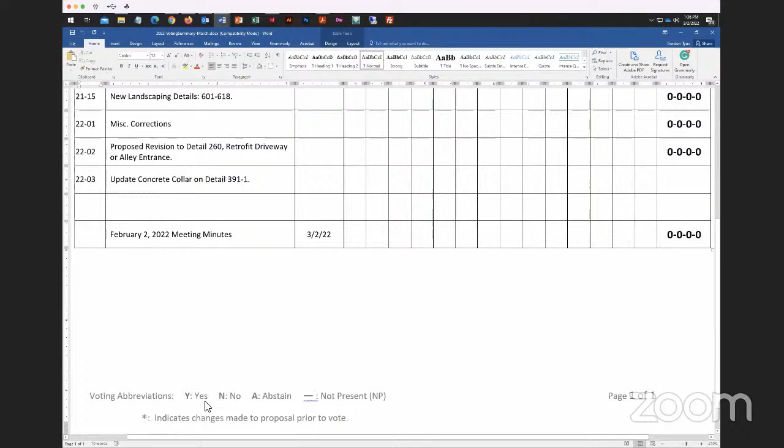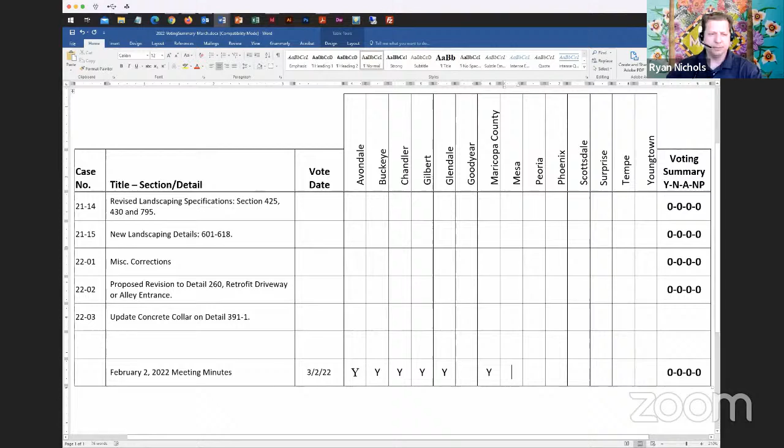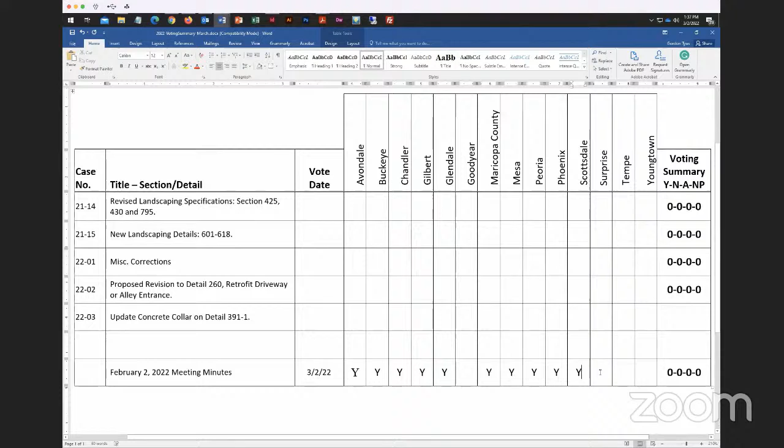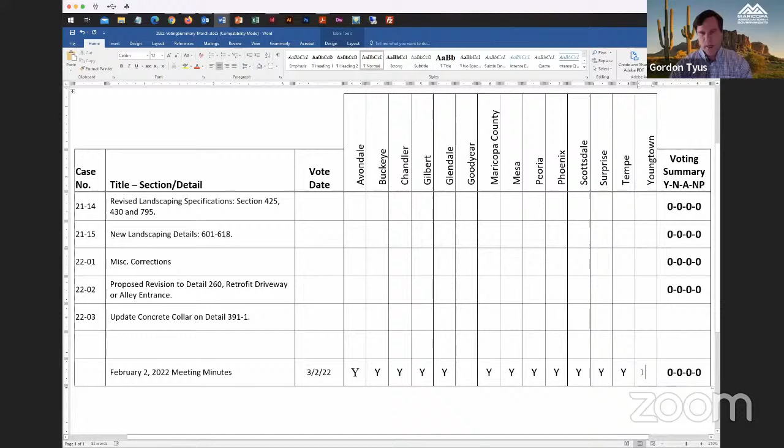Okay, and we'll do a roll call vote on the meeting minutes for today. Gordon, if you want to walk us through that. Sure. Starting with Avondale, yes. Buckeye, yes. Chandler, yes. Gilbert, yes. Glendale, yes. Goodyear—anyone from Goodyear? Maricopa County, yes. Mesa, yes. Peoria, yes. Phoenix, yes. Scottsdale, yes. Surprise, yes. Tempe, yes. Youngtown? Guess they're not present.

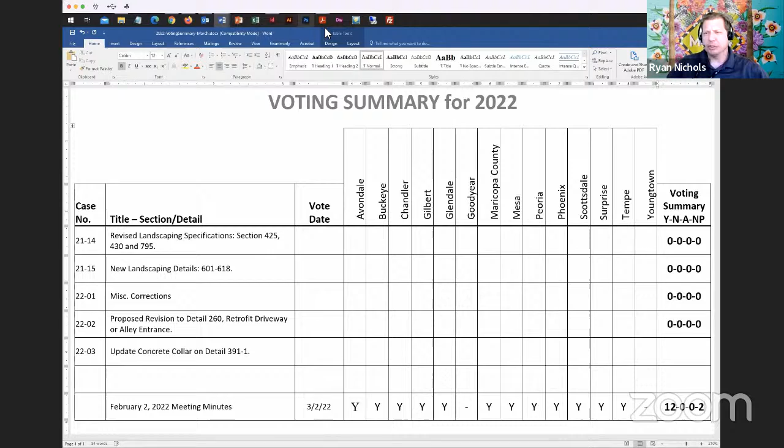Okay, thank you, Gordon, I appreciate you walking us through that. So we're ready for agenda item number 4. Actually, Gordon, I think I missed on the agenda any introductory discussion. So before we get into those agenda items, do you want to talk through the potential for meeting in person?

Sure. We're notified by our executive team that for the month of March, they are beginning in-person meetings for our policy committees, which include the Regional Council, Management Committee, Transportation Policy Committee, and so on. Then beginning in April, they're going to start in-person meetings for any of the technical committees, including our own. So if this group would want to meet in person on our April meeting, which is on—let me check the calendar real quick—April 6th, we would be open for doing a hybrid meeting where we meet in the Ironwood room as we've done in the past, but also have a Zoom meeting that people could join remotely, and the people in the room would also participate because the mics and video in the room would be fed through the Zoom system as well.

So that's, I guess, what MAG's plan is, and I just want to get the feel from this group. If you're ready to come back to meeting in person, if you prefer meeting in person, or would prefer to call in, we need to get an idea how to support the hybrid meeting. Those are some of the things I'd like to get feedback on.

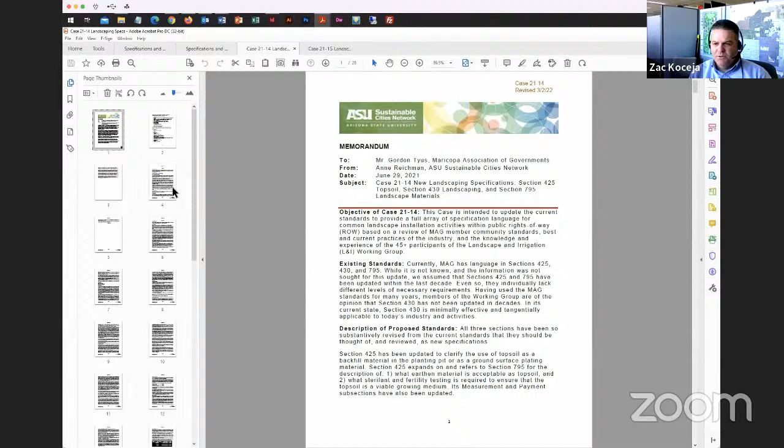With the beginning of 2022, we've picked up this effort again, and in the last month or so we had a couple — I would say minor — comments that were added. So I went through and updated those, incorporated those comments into what we have today that's available in the packet to review. The most recent wave of changes I incorporated, a lot of them were grammatical in nature, sentence structure, things like that. I don't know that there was anything really major that would change the intent of what these specification sections are focused on accomplishing.

At this point, I think what we're requesting is that this is our draft of these three sections, and we're hoping we can get these out to the MAG committee and solicit any comments in the next month or two, and hopefully finalize this process and get these incorporated. It's been a long time coming — the landscape and irrigation specifications and details in MAG are very outdated. A lot of cities in the valley have their own supplements to MAG, Mesa included. So I think this is a really valuable effort to standardize as much of this as we can, so it becomes a really good resource and tool for the cities in the valley.

Ryan, that's kind of the overview and introduction. Is there anything specific you want me to talk about, or? Well, let me just clarify one thing.

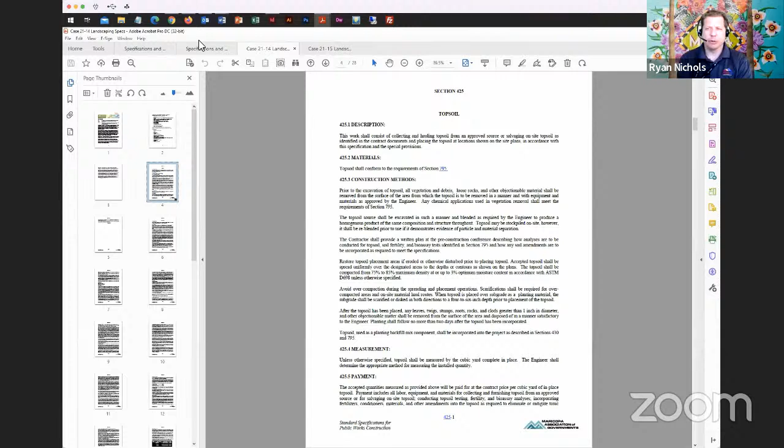I think the latest version was not in the packet itself, but has been posted to the website now. Is that correct, Gordon? Yes, and I sent out an email reminder this morning that included the link.

So they're on the meeting page here. These are the latest versions that were just uploaded today, this morning. So this is the latest and greatest for you to download and review.

I know they're hoping to get the final reviews done. My understanding is some of the edits that were just made were based on comments received by the city of Tempe. In our last meeting, I know there were a couple agencies that had indicated they wanted to get the specifications and details in front of others within their organization. I have not received any additional comments thus far, so I don't know if any additional comments have been generated yet.

If not, please take a look at the most recent drafts here, as we just showed with the links, and then please forward any comments to myself, and I'll make sure they get sent to the group, including Zac and Wayne. Peter, did you have something else that you want to talk about with regard to these?

Yeah, I just wanted to thank everybody for going through these. We've had these on the agenda for quite some time. And I think last time we talked about getting these revisions in which incorporate comments received to date, giving everybody a month or so to go through it, and then looking for a vote in May.

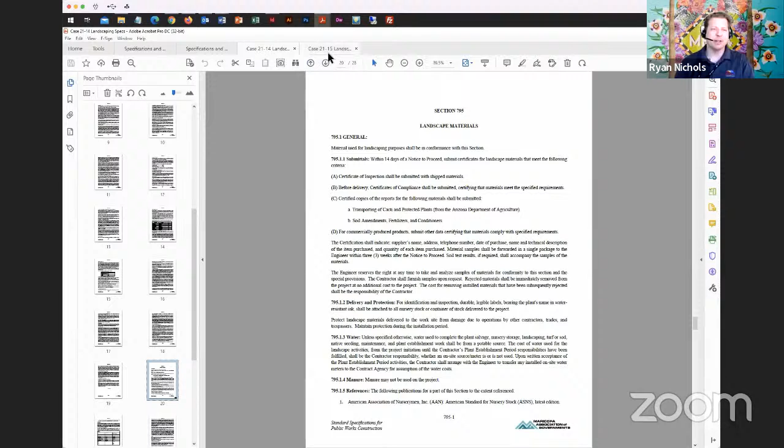We've got the expert here today, so today's the best day to ask the questions. Peter is here today, so that's good. Oh, no, I only know the landscape I got to do in my yard. No, I've done a little bit, but you guys are the better experts. No, I appreciate Gordon, Peter, and Ryan for your guys' involvement and support to get it to this point. So yeah, thank you.

Yeah, I think they're looking good. I've gone through, when we had it through the working group, I went through and had my detailed comments, and I think these are the first, we have details now. We didn't before, so I think that's a major improvement from where we had been.

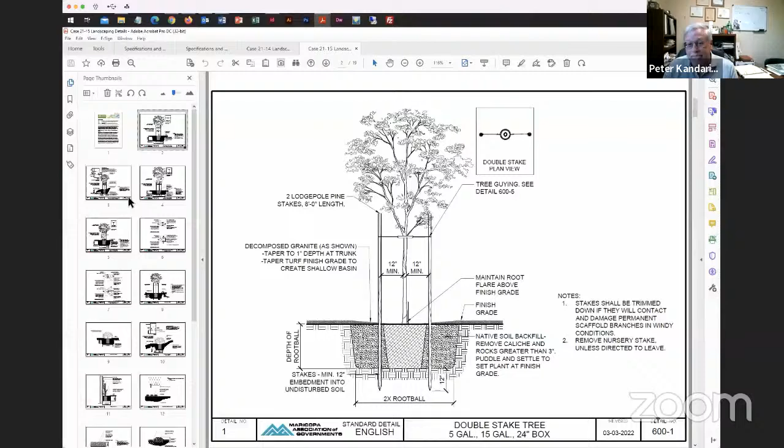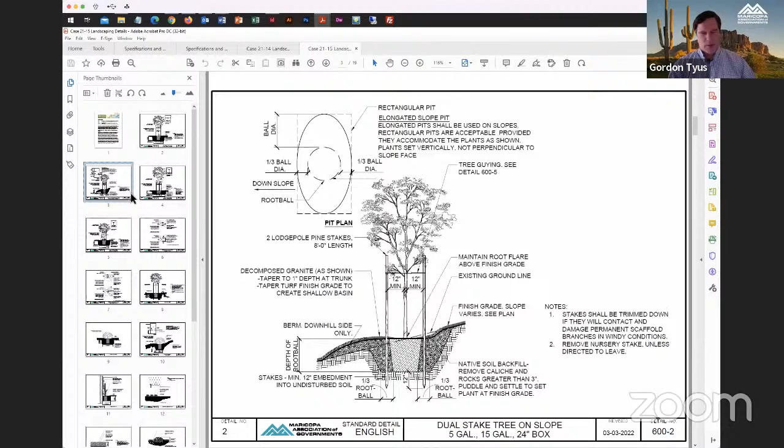This is Warren. Just a minor comment on this one, for example. I think the 600-1 detail number on the bottom right, we just need to have the 600-1 on the lower left as well for consistency. Easy stuff. Yeah, right now they've all been numbered as 600-3 and so on.

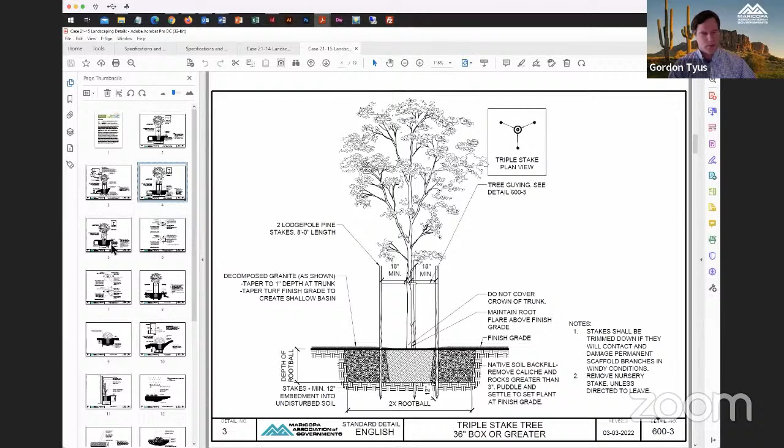Is that the preference of the group, or did you want to have different numbers for each one, like 601, 602? But yeah, you'd want the same number on this side as well.

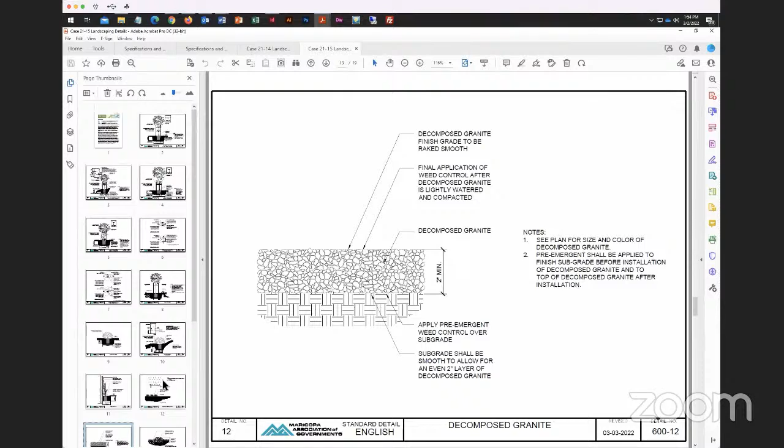These are all planting details then, right? No, I would say there should be distinct detail numbers for like the granite. Maybe you could have a series for the planting, but I would say it should be a distinct detail number.

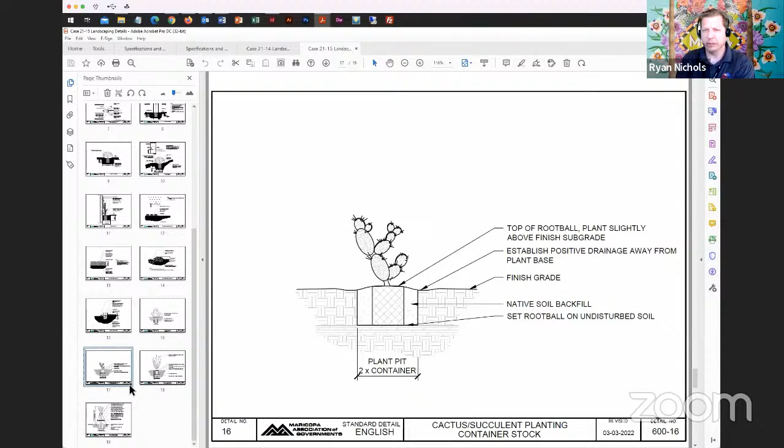Do we have any other details? The 600 series is new, correct? There's no current 600 series? Correct. And I guess the question that I would have is, is there an intent to have other details be 600 series in the future? We're going to have the irrigation details too in that same series.

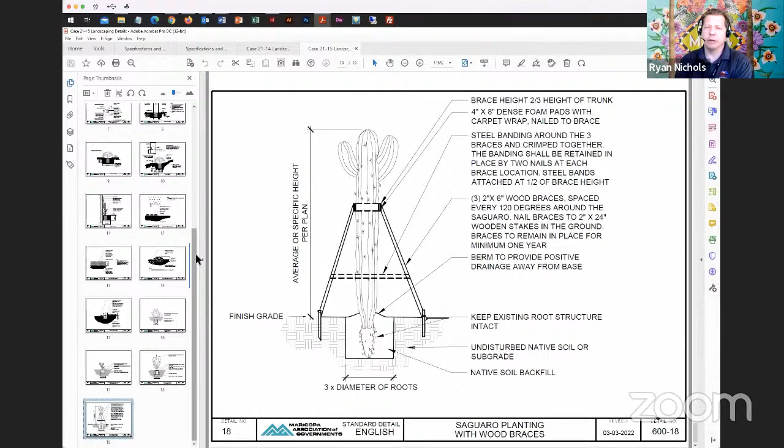Okay, so we're not going to run out of 600. If every detail was numbered individually, 601, 602, 603, we're not going to run out of numbers for this, right? We may want to look at putting some of these in a series, like planting details, to try to start grouping them a little bit in terms of concept. So hardscape versus vegetation, things like that could be one way to look at it.

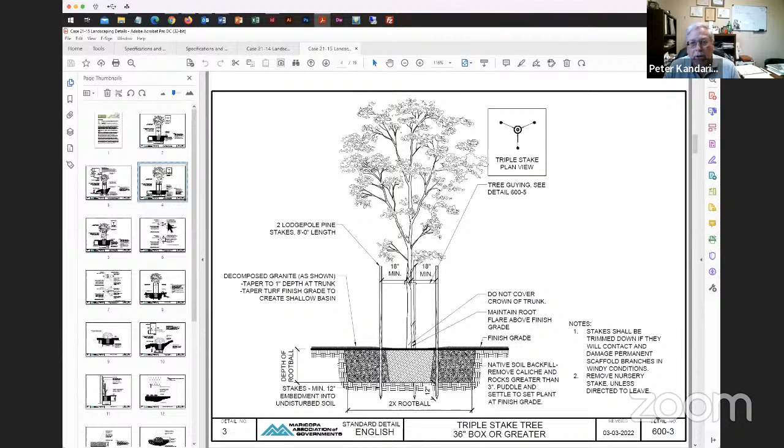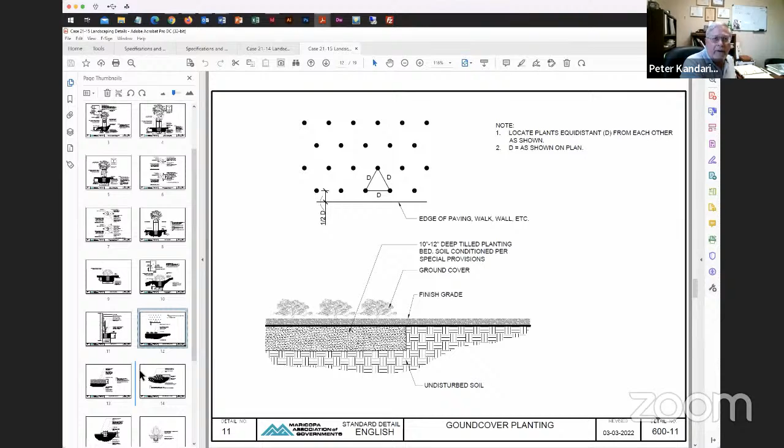Yeah, I agree with that. I think that makes a lot of sense. I don't think there's any value in just having it 600-5, 600-6, and continuing the series for every single number. Yeah, let me take a look at that. I'm going to give a shot at what I'll send you, Zac, a recommendation when I'm looking at it. I want to look at another standards book that I've got and see how they're doing their series.

And see how they're grouping these. Again, I know hardscape probably is going to be one group. So, 601 hardscape, and then there'd be -1, -2, and so on.

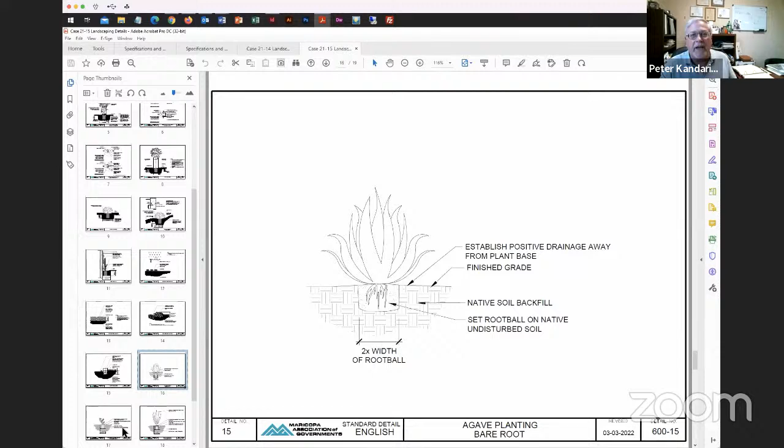But I need to look at another standard that's been used in a similar manner, and I'll send you a recommendation at least. This is Carl. The 600 often refers to the section in the written specs, at least that's how we kind of do it at the county. And 600, I believe, in the written specs is more like concrete related, or channels or concrete. Whereas we developed landscape specifications

and they're under 430. So I don't know if you want to think about that in terms of what number series you want to use. I don't think this, 400 is wastewater though, Carl. Yeah, is it? Yeah, I don't know that the specification sections align with the detail numbers.

Is there any other place in MAG with landscaping? Yeah, there's currently a 700 series also. Chandler is using 700 if that helps. And I think we're using 600 for streetlights and traffic signals.

Yeah, that's a problem where the specs numbers don't necessarily align with the same on the details. They don't really align on any of our details though. But it is a good point that if several cities are using similar numbering systems for their landscaping, whether it's 600s or 700s. Yeah, with the county, we try to align the spec, the details, and the bid items, at least the root number of the bid item with the parent section in MAG.

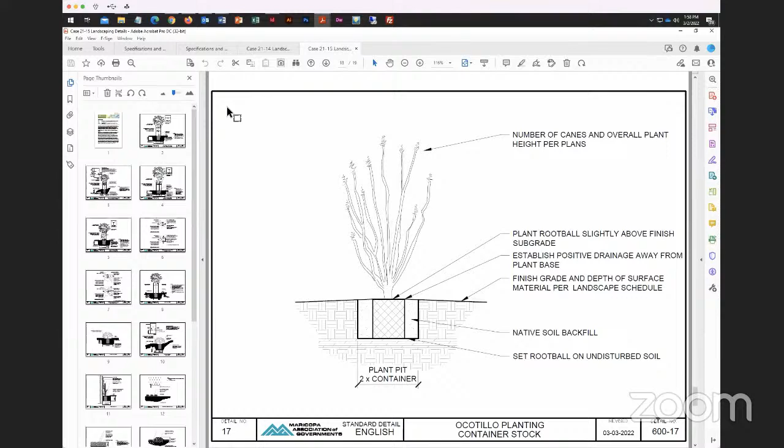And sometimes we actually create a new section, but something similar in the 400 or the 600 series. Yeah, in Avondale supplement, we don't have any details for landscape irrigation, but we do have a spec section, and it aligns with the specs and spec section in MAG of section 400.

Yeah, so we run into the challenge of how best to start a new section with something a few cities already have. And some agencies, they have it as a separate document completely outside of their supplements, so they don't even, as far as I know, have a similar series number. So it's really up to the committee. What do you want to do? What series do you want to assign to these landscape irrigation things, or do we want to start a section that deals with things that aren't anywhere else?

Yeah, I know these details will actually become bid items, so you got to kind of think about that. If it's a bid item, then it possibly refers to a section in MAG that describes what it is and how it's measured and how it's paid for.

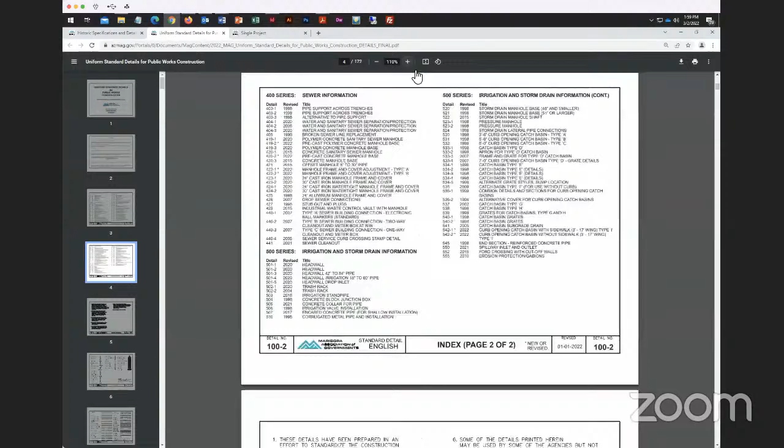I think MCDOT has kind of evolved to try to get them somewhat related. We would need to do that in a lot of MAG if we were going to do that, because right now that's not the case. Right, that's a bigger discussion than this, yeah.

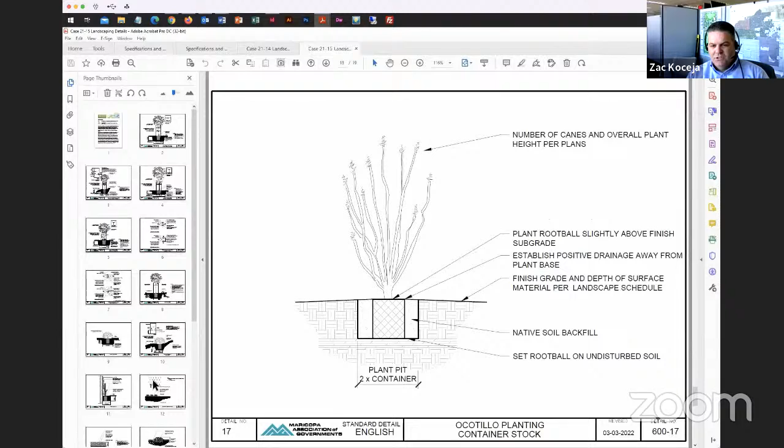Well, landscape, all of your details you're showing here, are they plant related, or are some of them concrete? That's the majority of them, but there's also a concrete landscape header curb, a DG placement detail, a boulder placement detail. And then we'll also have a series or grouping of landscape irrigation related details as well.

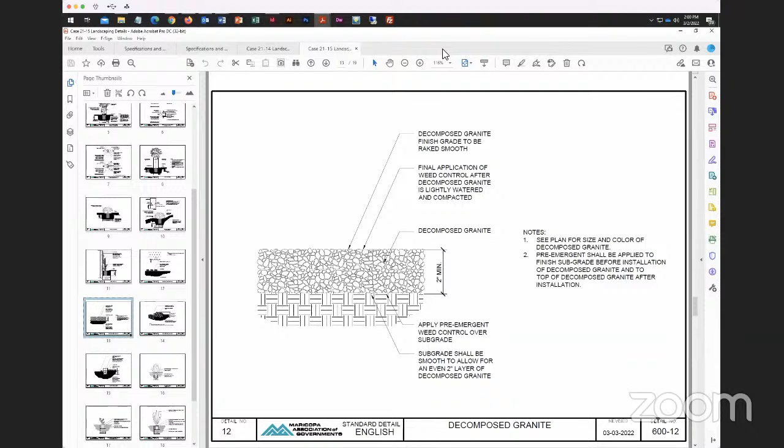So that'll complement this. Yeah, some of them are somewhat concrete related, and others are more plant and landscaping related. So yeah, it probably is kind of tough to say. But yeah, they probably should all be in a series that's somewhat by itself and not confused with another part of MAG. And we also have to realize if we get the landscape irrigation, we don't want that confused with irrigation as it's described right now in MAG, which is more of a piping system. Think of it that way.

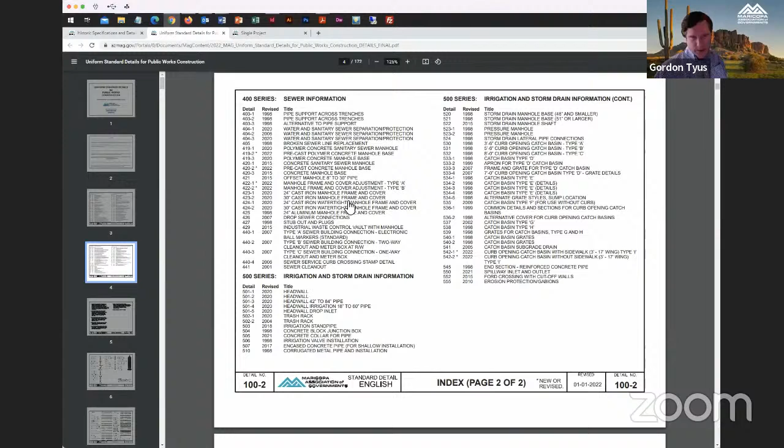Yeah, I've just pulled up our current detail table of contents just to show that it ends in the 500s right now. Okay, so yeah, we actually are in a brand new section. So actually that makes sense then.

And just related to that, one thing I wanted to point out is our landscape irrigation, we don't just call it an irrigation section. We always put landscape in front of it to help differentiate from any sort of irrigation or storm drain information, like what's on the screen. So I'd suggest that we keep calling it landscape irrigation, and that helps to really set it apart from any other irrigation system that may be covered by MAG.

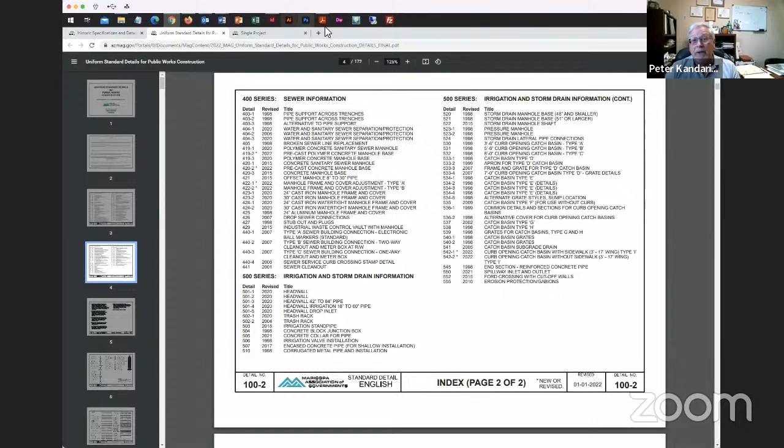So right now we can hold with just the numbers, but I think by the next meeting we probably need a decision: do we want to go 600, 700? I think we chose not to go into the thousands intentionally, because that would get more confusing. So I think we had 6, 7, 8, or 9.

600 I think is fine, but you might look at grouping them, like a 600 series, a 610 series, if there's some differentiation within your details here. Yeah, that's what I wanted to go look at, another source I've got for how they've been grouping their standards.

There's a national CSI format, not federal, and they also have that grouping system. So that's what I wanted to go look at, to see how CSI has been doing theirs.

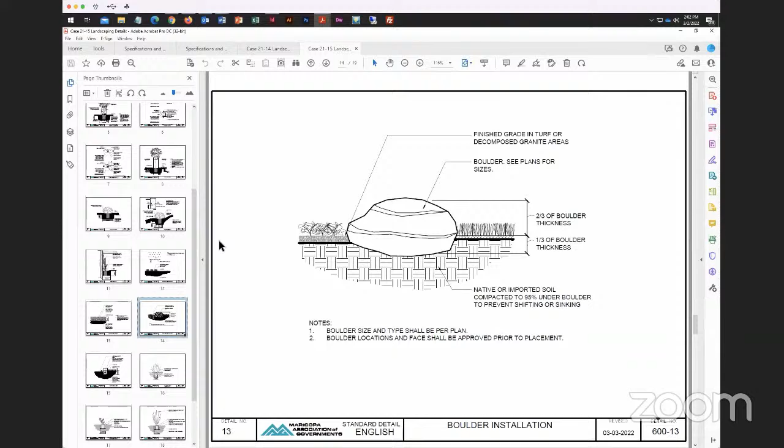Peter, was the intent to have landscaping under one 100 section and irrigation under a different 100 section? No, the thought had been we're going to put them all under one. So everything would be a 600-something for any type of landscaping setup.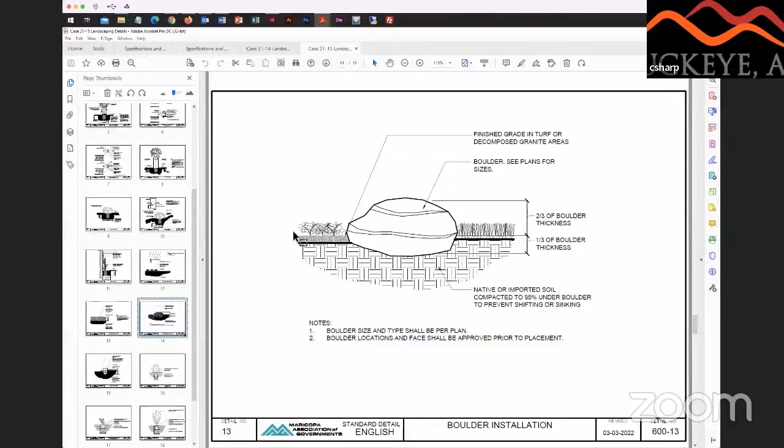Landscape irrigation, if somebody comes up with something else. I'm even thinking, how do we want to handle gabions? The existing gabion, is that really more of a landscape hardscape feature, or truly a wall, or do we want to look at a more landscape-specific gabion? Well, that would go in the landscaping section if it's not a structural element. I'm thinking they'd all fall in that same arena.

Zac, do you know if there are any other changes to the details other than numbering them? No, I don't believe there was, I think it was just an effort to update the numbering. I know Wayne worked more specifically on those, but I don't recall anything else being mentioned in our last few meetings other than updating it to the 600 series.

If I remember right, these are heavily borrowed from City of Tempe. Correct, because we got the CAD details from them.

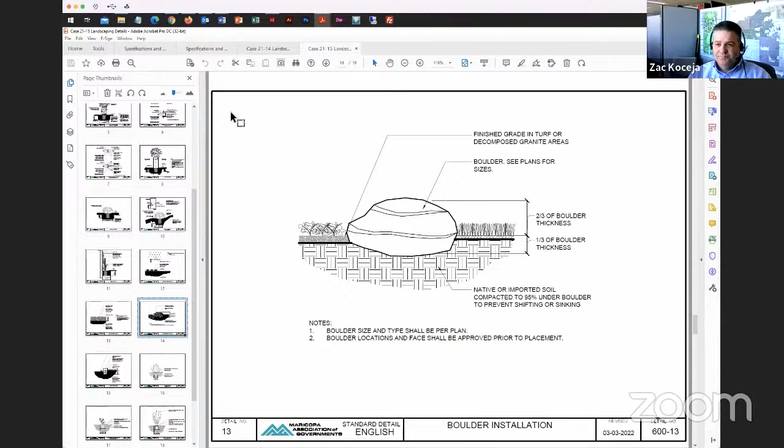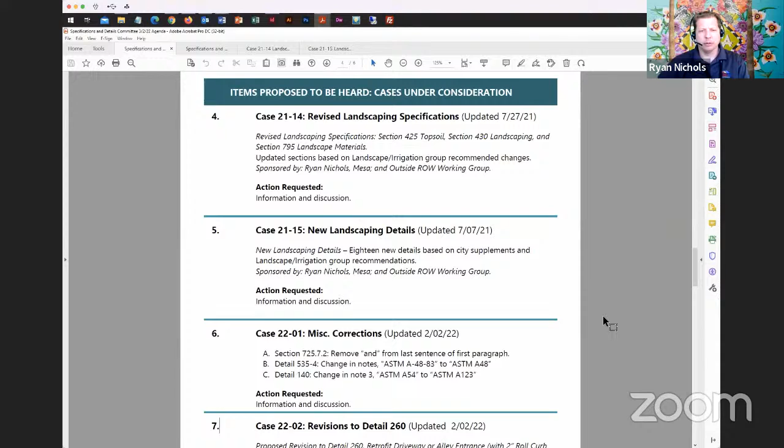Any additional questions or comments on landscape specifications or landscaping details? Once again, if you have a chance to have people within your agency review those this coming month, please send me any comments and we'll work to address those.

Moving on to agenda item number 6, case 22-01, miscellaneous corrections. We've got three of them: Section 725.7.2, to remove the word 'and' from the last sentence of the first paragraph; Detail 535-4, change in notes, the ASTM numbers are being corrected or updated; and Detail 140, same thing, the ASTM being revised from an outdated one to a more current one. Are there any other miscellaneous correction items people would like to add?

Any other discussion on these items? Hey Ryan, I apologize, going back to item 5, I forgot to mention, when I was on the MAG website today, Gordon, the links for the landscape items are not working right now.

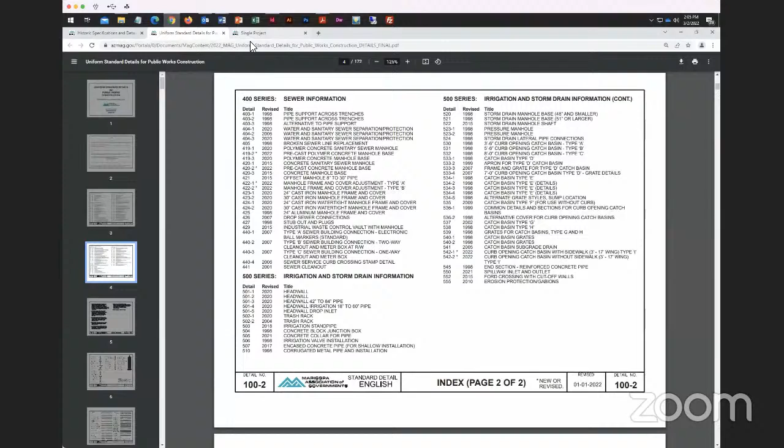Let me check here. So these ones? No, the case links. The case links, on the page before this. Yeah, the under-consideration ones. Oh, these? Yeah. You're right, I guess we'll have to check on that. Okay, they are linked here on the materials side, so I'll need to fix these hyperlinks, but they are right here and here in the list if you want to get them there. Okay, thank you.

Good, I like that, Warren. That means you're downloading those and sending them to people for review, right? Exactly. Do it during the meeting, guys. That's good, that's a good strategy. If I knew how to do a thumbs up in Zoom, I would. I only know how to do that in Teams. Thank you, guys.

Moving on to item number 7, case 22-02, revisions to detail 260. Warren, you want to give us an update on this one? Sure, I have not received anything in terms of comments from folks out there, so unless there's anything, let's go ahead and open it up.

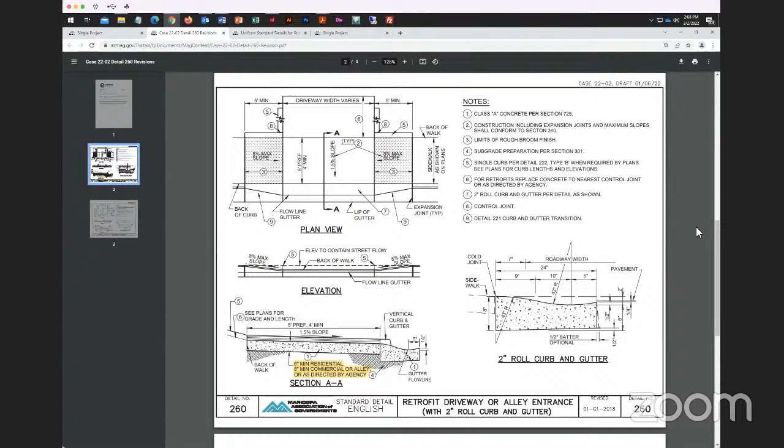It was a pretty simple update, just that in yellow, to update the thickness for commercial or alley to 8 inches. So unless there's any feedback or comments on this, I guess we might like to call for a vote at the next meeting. Anybody have questions or comments, or feel like they need more time to review this detail? Okay, hearing none, then Gordon, let's put this as proposed action for our next meeting.

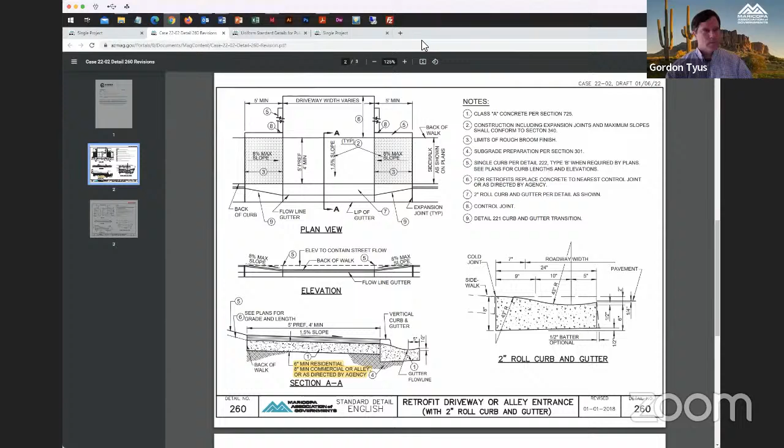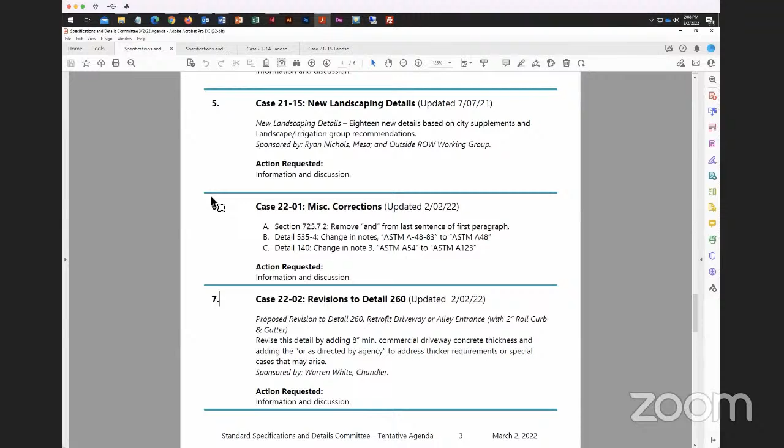Thank you, Warren, I know you spent hours and hours working on this intricate detail. Exactly. All right, let's move on to case 8.

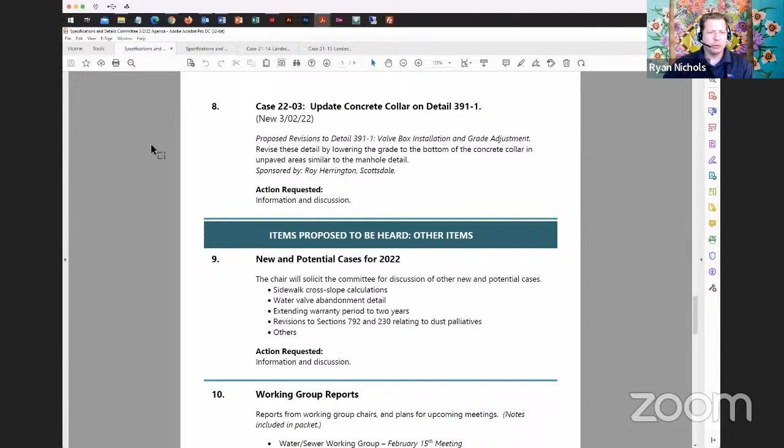Item 8, agenda item 8, case 22-03, our update to the concrete collar on detail 391-1. And Roy. Hello everybody, so this was an item that we brought up for the first time last month. The discussion was to bring it forward as a normal case.

Essentially, where this is coming from is a comment that's come to me from our maintenance folks out in the field, having issues with the existing collars around the water valves, basically getting silted over or even getting plugged. And that was when we started looking at the detail.

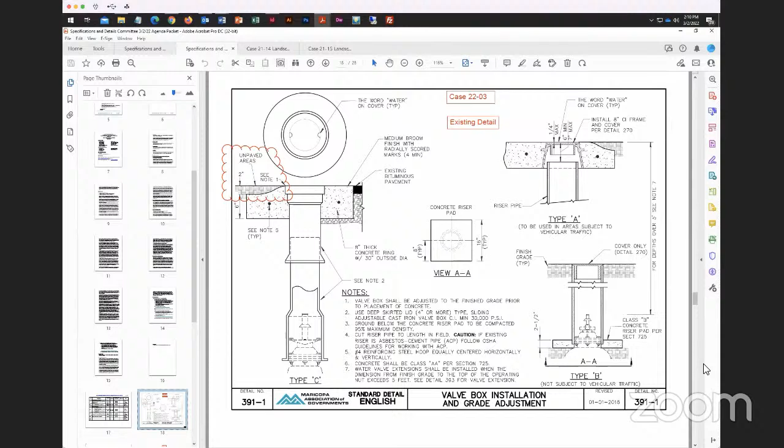What you see in front of you is the detail as it exists today. On the left side I've clouded it there. It shows the 2 inches of cover over top of the collar. So we discussed this a little bit in the meeting, about whether the collar needs to be curved like it is there, or whether it can be straight and flat.

I went back and talked with our maintenance folks, and they were certainly fine with having it as a straight slope, but they still would prefer to keep the 2-inch elevation difference between where your existing grade would be and where your top of collar would be. So the difference between what we had last time and this is that the slope is now a straight line as opposed to a curved portion. I also added the call-out underneath for the diameter, the 40-inch outside diameter.

That 2-inch difference is coming from some of our other existing details, which are the examples that follow. This is the example of our survey markers, where we've got a 2-inch difference in areas that are not paved, and they also call out the 40-inch diameter for the collar. The next example is our sewer cleanouts, where also in unpaved areas we've got the difference in elevation between the frame and the top of the collar. And the last one, which we looked at last time, is the manhole frame and cover adjustment, again for areas outside of pavement where we've got a 2-inch difference.

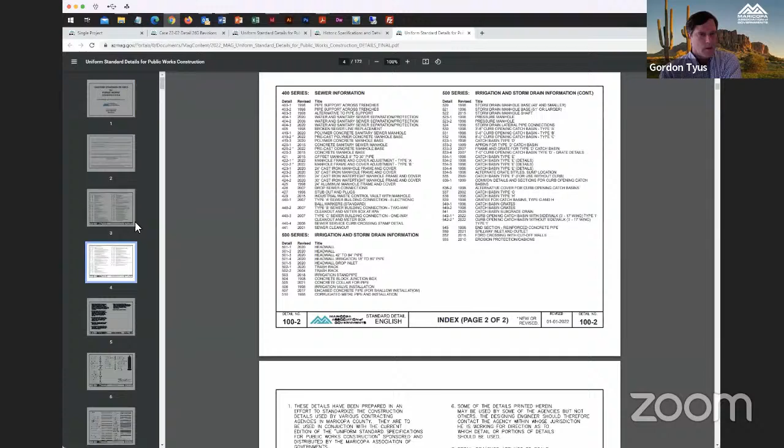I think that's what 391-2 shows, if you look at it. I don't know if Gordon's got the whole book handy, but I believe that's what it shows. Yeah, there's that concrete at the bottom, the pad. So we could actually take the concrete pad detail and move it over to the 391-2, because on the 391-1 the pad's not used, since it's the cast iron valve box.

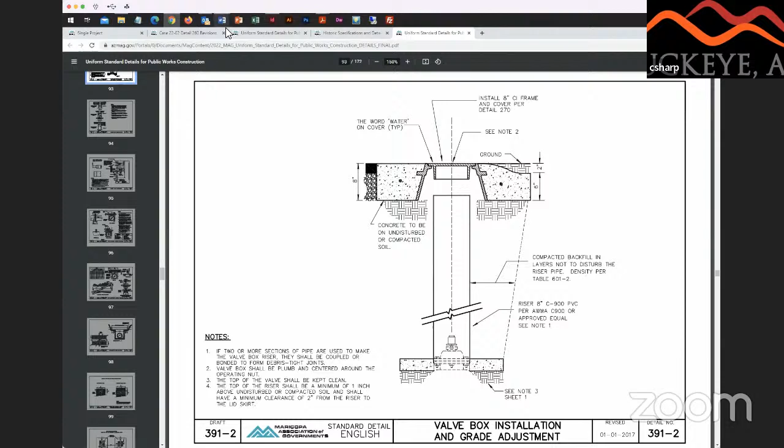I think 391-2 is more the adjustment part, so they're not going to go down and put that riser pad when they're adjusting the valve boxes.

It just seems like we have way too many adjustment details on this one, right? I mean, the graphics need to all be consistent, but there's some consolidation here that we could make. Maybe.

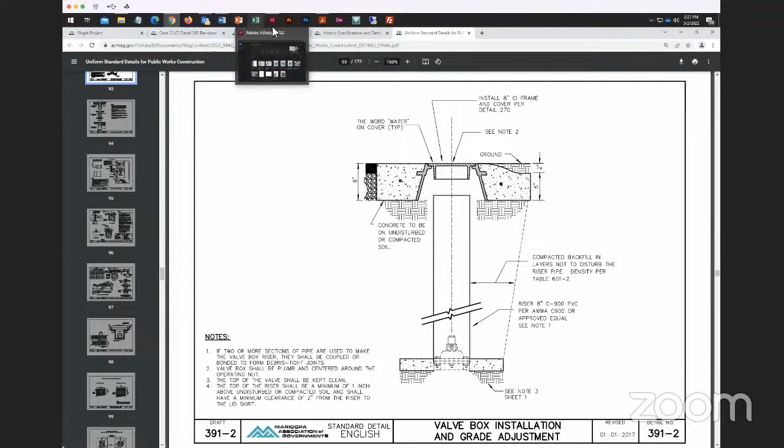I think on 391, we could definitely combine those two into one if we're going to leave it on there. Yeah, I agree with that. I guess then it looks like the only difference, if we combine them, is you're going with a different frame and cover. But if it's the same, you're still having detail 270 for both your cover as well as your frame, because now you're adding a frame. Basically detail or type B becomes type A.

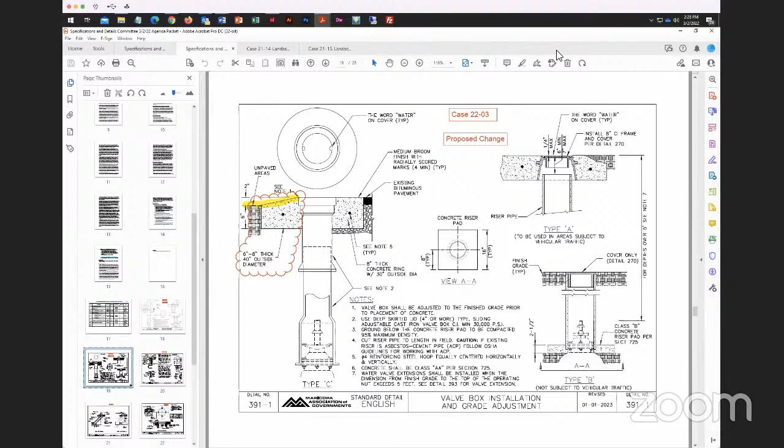So I guess back to, is there, or maybe I'm missing something. On type C, is the deep skirted lid in use today? Yes, that is, City of Scottsdale uses the type C. The type C, you can put different lids on it. You can do lockdown, there's all kinds of choices, and yeah, you can put a deep skirt lid if you want. That's what we do. We use a 391C, and then we just choose a deep skirt lid.

But Roy, I do agree with you. I think if we could combine the A and B, the only revision there would be we'd be adding a frame. So adding a frame, but then we would still want the collar too. Correct, so we add the frame and the collar, and then doesn't that become a type A? That's correct, yeah.

Speaking of this type A, would you want to make the same change to this one as you do for type C, where it goes at an angle and you have a 2-inch reveal? I would suggest that.

We can take this up at the working group, Roy, if you want to get down into the more nitty gritty of it at that meeting. But feel free to update this, and then you can submit it at our working group meeting. Will do.

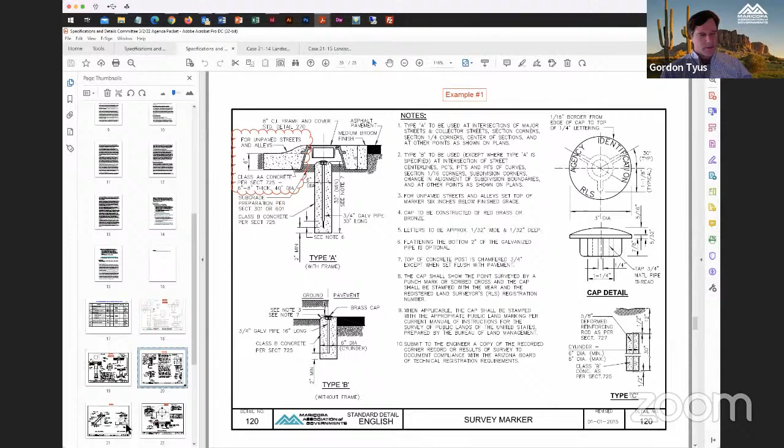Is there any thought to changing these details to a straight slant as well, the survey marker and the sewer cleanout?

I think consistency would be a good thing across the board. Yeah, I think it's pretty clear when it's a straight angle versus that reverse curve, which doesn't really have any data on how to exactly do that, so I think the straight grade is better for constructability. I agree. Plus the drafters will be happier too.

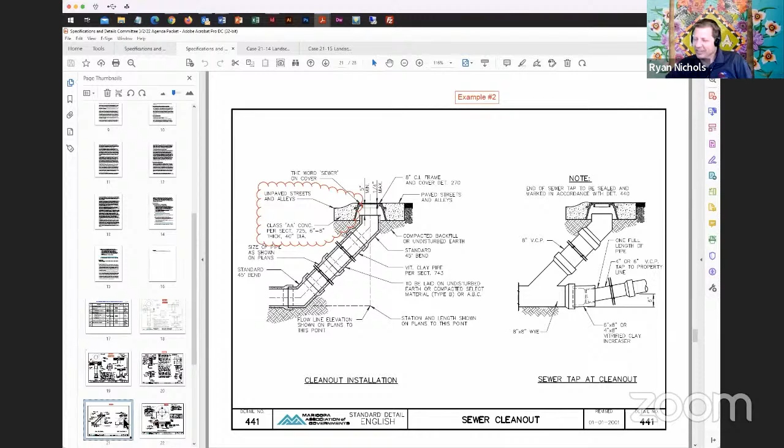Hey, I don't know that sewer tap at cleanout, it actually kind of rises up before it goes down. Yeah, you got a little hump there. Yeah, it does, little camelback.

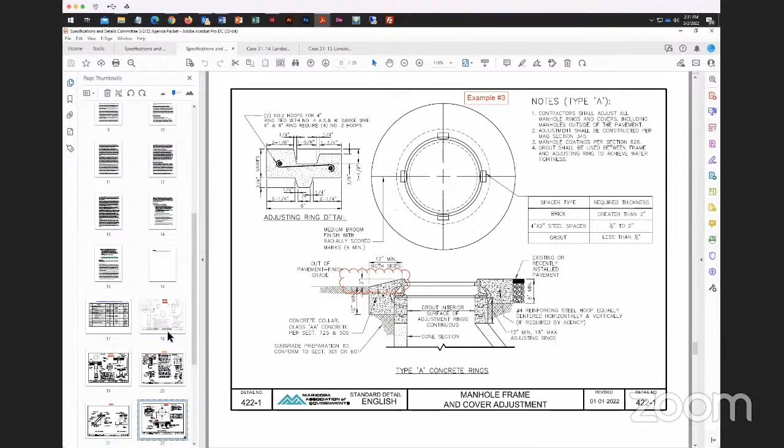Would the committee like me to basically revise all those? I don't know whether each one of these becomes a separate case, or we're able to keep it as the same case, but whatever the committee would like, I'm happy to revise them. I think a single case is fine as long as we're listing each detail we're modifying.

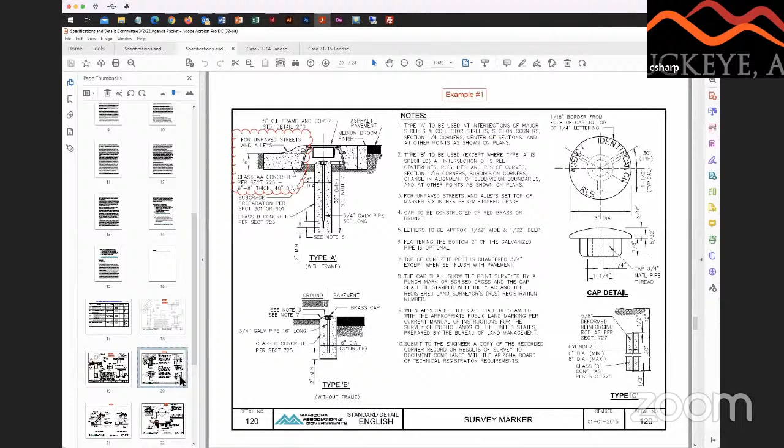Another thought is, if we're just changing a line on some of the other details, can we make that a miscellaneous case? If we're going to make major changes with 391, we can do that, but we can make just a miscellaneous case for changing the slope of the collar. I like that.

Are they all 40-inch diameter? The survey marker one calls it out, and the next one is just 40-inch, so that's 40, and the last one calls it out as well. Yeah, I think make sure we got the 40 in there. I think the really small ones just won't stand up in time with the traffic and weather, especially on unpaved roads. Right. Okay, I'll update those and I'll play around with the 391.

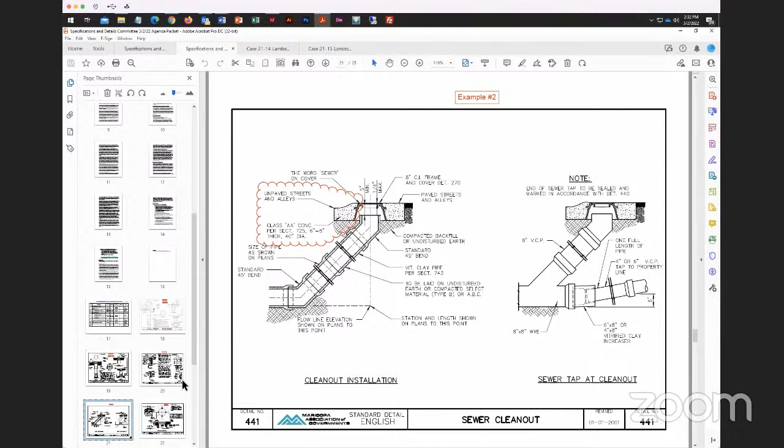Do we still want to have a Type B? I'm assuming it'll just be... I don't know what the difference between the A and the B will necessarily be. By definition, Type A is used for vehicular traffic, and Type B is not subject to vehicular traffic. I guess, Roy, I'd probably just ask around and see if anybody uses the Type B. If it's not being used, then we use Type A for vehicular traffic or off the side of the road.

So would the committee be okay if this detail ends up with a Type A and a Type C, but not necessarily a Type B?

I think that would be appropriate, because you got to go back and look at history sometimes, what we did have at one time. It shows up in court cases and other things.

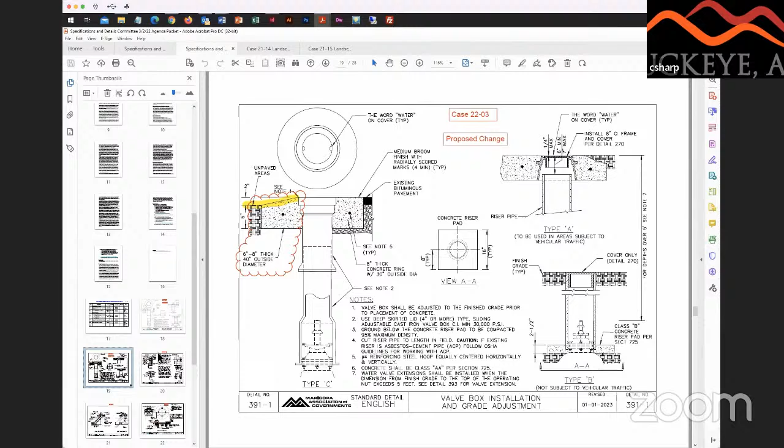The other challenge too is supplements actually call out 391-1 Type C. And if we change that Type C to something else, then supplements have to change. Exactly. Yeah, I don't think we want to change Type C to a different type, especially duplicating something we had in the past.

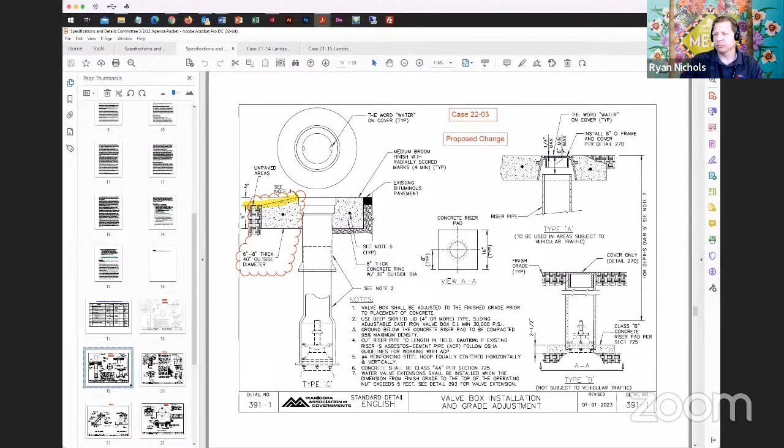If we leave out Type B, you might just put a note that says Type B no longer used, or Type B not used. Great, all right, thank you. Thank you, everybody, thank you very much. All right, thank you, Roy.

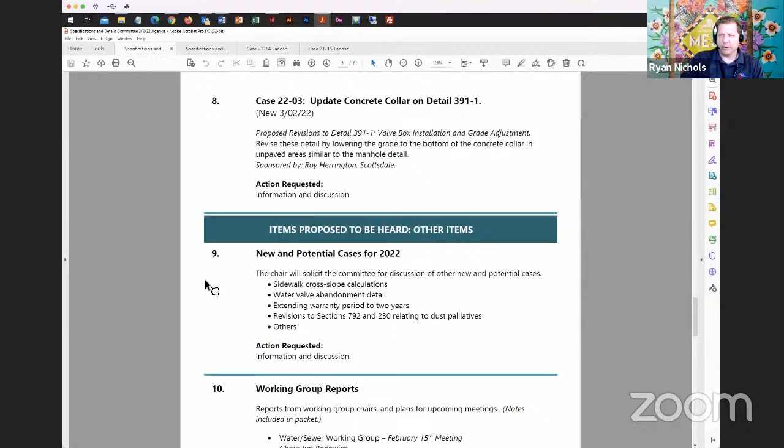Okay, agenda item 9, new and potential cases for 2022. We've got a few of them listed here. Before we talk about each one, I'll mention that the intent is to submit a new case for the landscape irrigation. We talked about the landscape specifications and details, but the irrigation ones are intended to be submitted for a new case in either April or May, depending on verifying that the drafts are ready. Those are new specifications and new details that don't currently exist, so we want to make sure there's a draft ready to submit for that case. That should be coming either April or May.

And then the other new potential case we've got on our list here is sidewalk cross slope calculations. Carl, I think that's one you've been looking at and considering.

Yeah, I sent you a hand sketch previously, and it might not have been really clear. So I took this detail, looked at it, and said, well, if we change the slope, the target slope on a sidewalk is 1% plus or minus 0.5%, then we get a minimum slope of 0.5% and a maximum of 1.5%. I thought that was the easiest way to do it. Or you could look at it as wanting a range from 0.5% to 1.5%. But I think in your design of your cross section, you might want to be somewhat consistent, and I hope changing it from 1.5% to 1% does not cause a lot of heartache in the design with the design people.

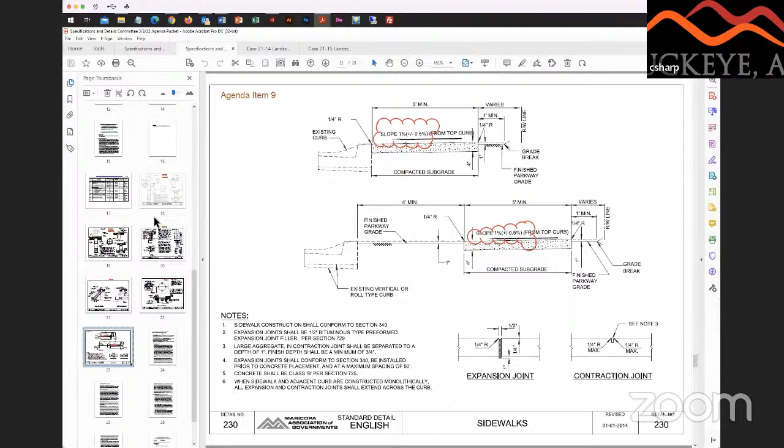I half recall our discussions back when we did the curb ramp details. We hashed this out a lot, as I'm sure all of us have done internally as well, these slopes and how to show them. But I think what we did is we put language in section 340 for the maximum ADA requirements, and we put the target on the detail, which is right now 1. But I'd have to revisit what we did on language on that.

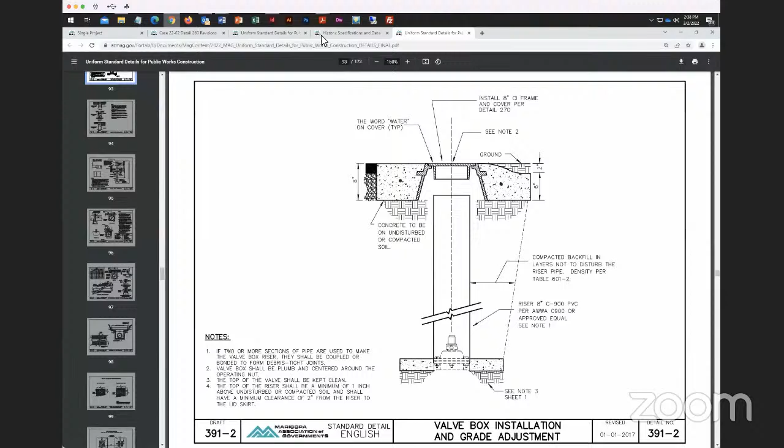I went to 340 and it says... I looked specifically for that, and it's got a plus or minus half an inch from plan, and that's where the thing originated from, how you could actually exceed 2% on a certain sidewalk if you went with that tolerance. So maybe we have to look at the spec too, or add something to the spec with the same range when it comes to sidewalks.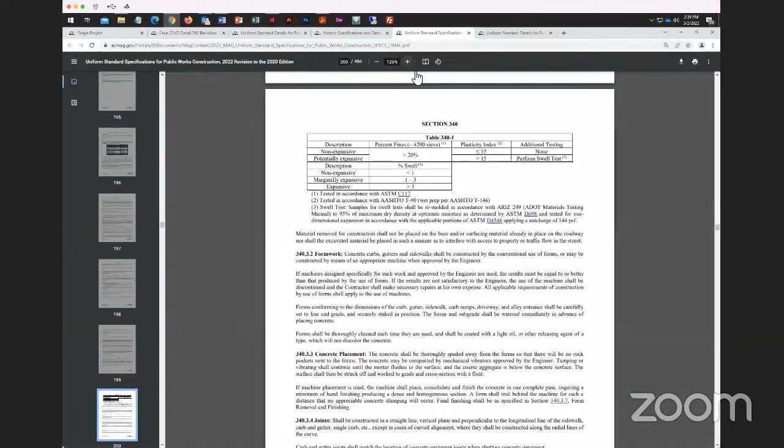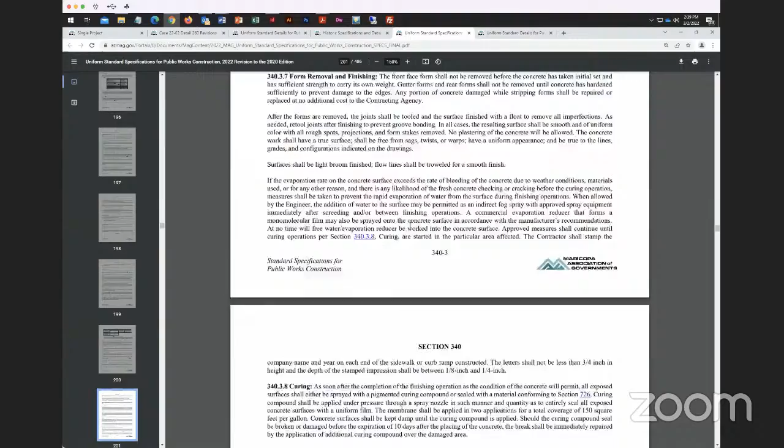I hear what you're saying, Carl. I thought we had something else in here about the ADA maximums. No, I might have missed it. Oh, there it is right there. Tolerances, slopes right there, the tolerances. One paragraph above deficiencies. Slopes of pedestrian, yeah, what is it? Yep, there you go.

So Carl, this is still a proposed case. If you're ready to submit a draft to present it as a case, you're welcome to do that at any time. Yeah, I do believe it is worthy, and we should do something about it, because we got a lot of sidewalk getting rejected for not being 1.5%. So yeah, I can go ahead and make it a case, or Gordon can. And I'll come back with your tolerances, as opposed to changing that grade, that design grade.

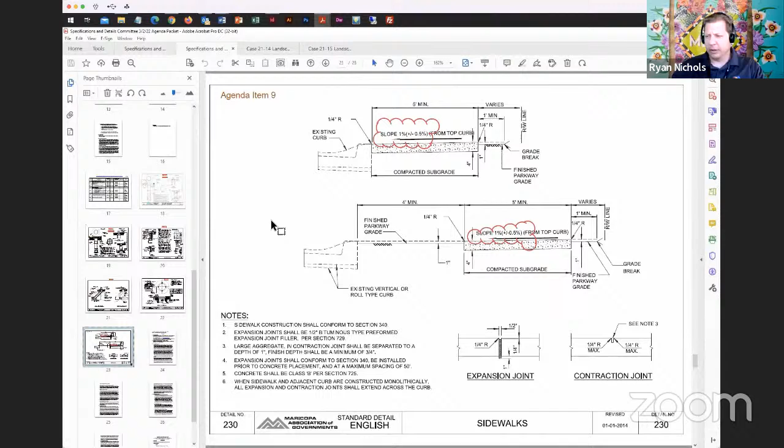The other proposed cases include water valve abandonment detail. Any news on that, updates? That was me. I don't have anything quite ready. Hopefully I'll be able to talk more about that at the water sewer meeting.

I liked that idea of having a manhole abandonment detail as well. So didn't know if people felt that could be the same detail, like we could combine both a water valve and a manhole detail, or should we keep those in the 300 and 400 series separate. But we can talk more at the working group. Yeah Warren, that's exactly what I brought up at the working group meeting. We should do one for the manhole as well. Yeah, I thought that was good, Jim. And I looked, Mesa has a good paragraph about the language there. So I saw 434.3, we can talk more.

Thank you. So Warren, you're continuing to work on preparing something for a future case, and sounds like we'll keep working on that in the working group. So thank you.

Extending the warranty period to 2 years. Any updates on this being a potential case? Yeah Ryan, I'm working on getting the specs. I've got 3 of them, I'm just kind of combining them. I did want to get a buy-in from the city. I know it's kind of a no-brainer, why wouldn't you want a better warranty, but I just wanted to confirm, and yeah, everybody wants it. So I'm comfortable with moving it forward with the case. I'm just working on putting it together now. Thank you, Jim. Yeah, and I think we had in our last meeting some pretty detailed discussion on that, and at least the initial feedback we got from the industry group was that the 2-year warranty wasn't a concern.

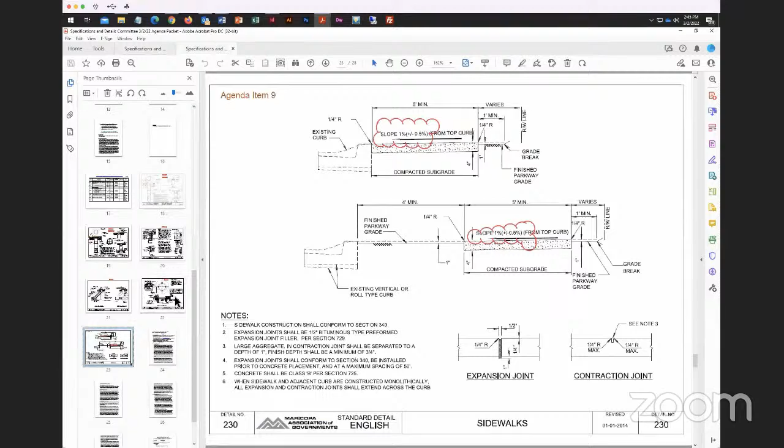Yes, we met on February 15th. It was an online meeting. One of the things we talked about was the case that Roy brought up on the valve boxes. So we talked about that.

The other thing that came up was sewer testing. As far as the gauge goes, I think most agencies do videos on sewer. Kind of looking for just people to say yes or nay on that. Yes, because yes. Okay, that's what I thought.

And then does the city do that, or do you guys use a third party? This is Chandler. We have a third party that we pay for the first. If they fail, the contractor has to pay subsequent.

So one thing we're finding out, we allow a third party to do that. We're finding that the gauge, typically you want to do it right after you hydrovac the line. You've got water in the line, and that's how you can determine if there's any bellies, sags, or deflection in the pipe. We're finding there's not really a spec that calls out how to do the gauge, and we're getting pieces of bent steel just with marker on it, very archaic I guess. The MAG doesn't really get into any detail on that, so we talked about maybe looking at coming up with a spec on that.

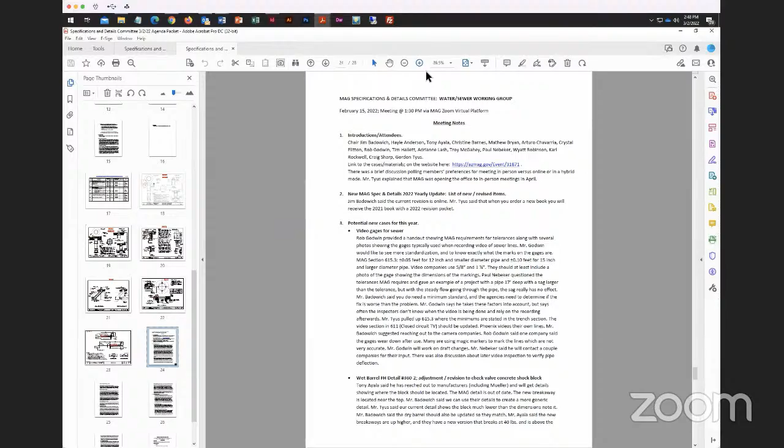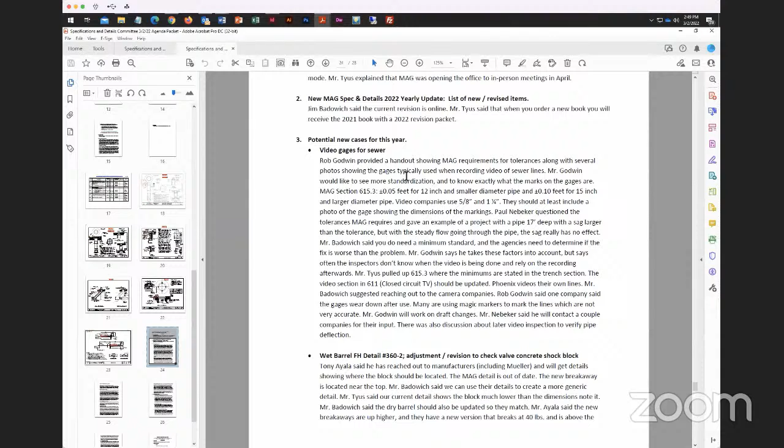We talked about, again, the wet barrel fire hydrant detail 360-2. We're finding out that the shock block isn't meeting what the manufacturers are doing, so we might have to put a range or modify that detail 360-2 again to match what the industry's doing with their check valves on the wet barrel fire hydrant.

Now I'm working on clarifying the detail on deep sewers, where we require, if it's deeper than 20 feet, to put rebar or reinforcing in the base, and I just want to clarify where that 20 foot stops. As I'm digging into it, I'm finding there needs to be more detail on how that rebar is supported. We had one where it was just supported on the edge, and when they poured the concrete it just dropped down in the middle. So there's nothing that specifies how to place that rebar.

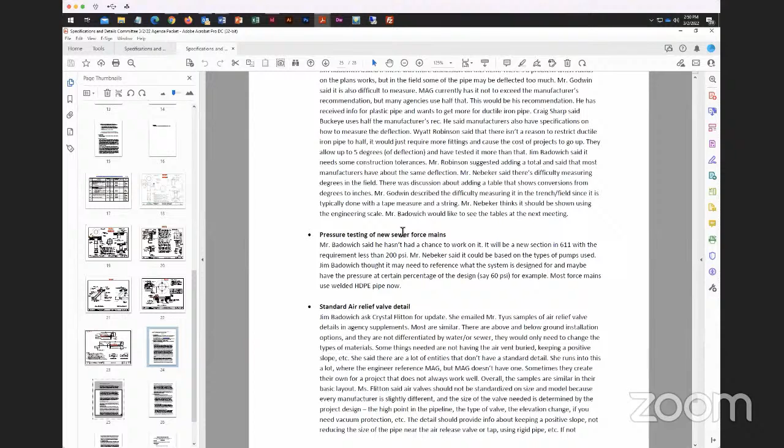Then the last thing we talked about was trying to come up with a standard detail for air relief valves. Crystal Flitton, she's an industry rep, had a lot to contribute on that, and it looks like a lot of the details are similar from all the various agencies, so I think we can come up with some kind of general detail on that. So that's what we worked on.

So our next meeting will be on the 4th Tuesday, March 22nd, because March has 5 weeks in it, so we wanted to bump it back to the 4th week. The next meeting will be March 22nd at 1:30, online, and we'll discuss at that meeting if we want to start meeting in person. There are a few people that would like to meet in person. Thank you, Jim.

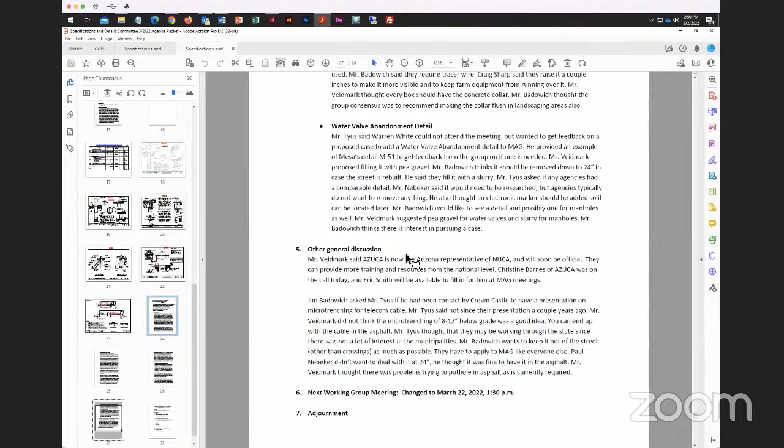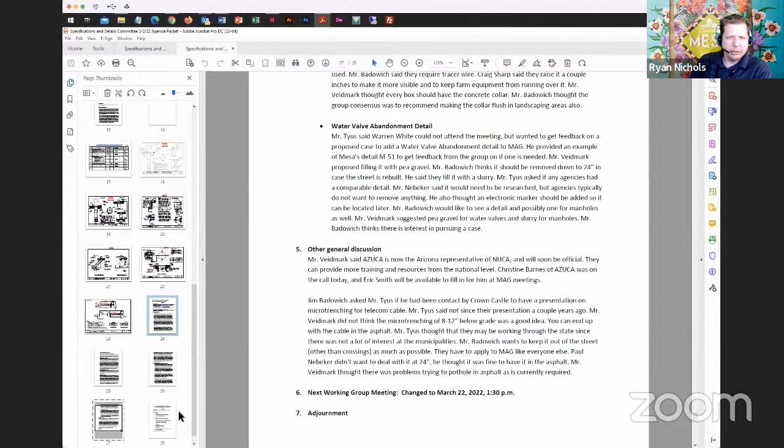Okay, our next working group - the material, asphalt. We canceled the meeting on the 17th, there was a number of conflicts to try to have the meeting. We definitely will have a meeting on March 17th. We have some items to discuss, some language on a couple of the standards we were looking at - 321, 322 proposed language. So we'll definitely have a meeting, and again it'll be virtual, and we'll have a conversation about what we're going to do going forward. I think it'll probably end up being hybrid though. Great, thank you, Jeff.

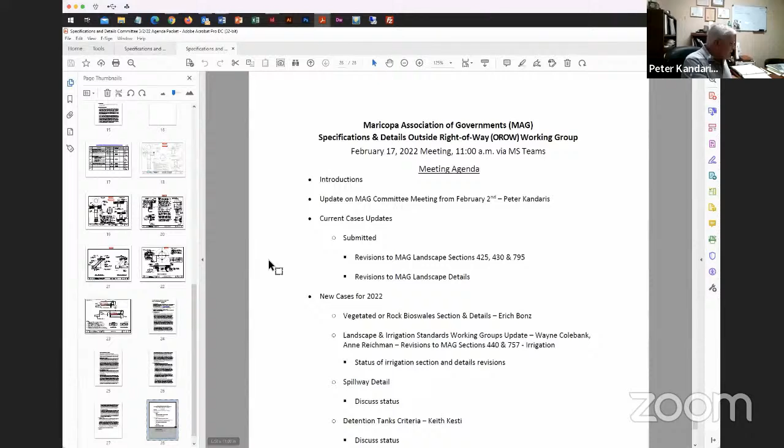And outside right of way working group, Peter. Hi there, Ryan. We had our meeting on February 17th, again very good turnout. We've talked about a lot of the items we went over already in terms of the landscape work, which is the primary work that's been going on. We got a lot of feedback on the vegetated or rock bioswales detail that's coming out, and an update on where we were - you heard already from Zach on what the status is on those, on the irrigation details.

The other ones we're looking at right now, the spillway detail - Erich is going to primarily be the one working on that. So he needs to finish up on the vegetated or rock bioswales, that's the one that was missing from last year that we did the sedimentation basin. Now we got to connect the two pieces together. So I owe him a few items. It's primarily in the research area.

Keith Kesti reported his status on developing the detention tank criteria. He's been talking to a number of people who have done some research or studies on that. He's looking both at the metal type and the prefabricated ones, so he's talking to vendors also at this time. I expect we'll probably see something in the May timeframe on that one, based on what I heard from where he's at. And I'm working on the drywell details - I've got a rough draft, I've got to get some drafting time to do some cleanups and get it to the group. My hope is at the next meeting we'll be able to start doing some reviews on those.

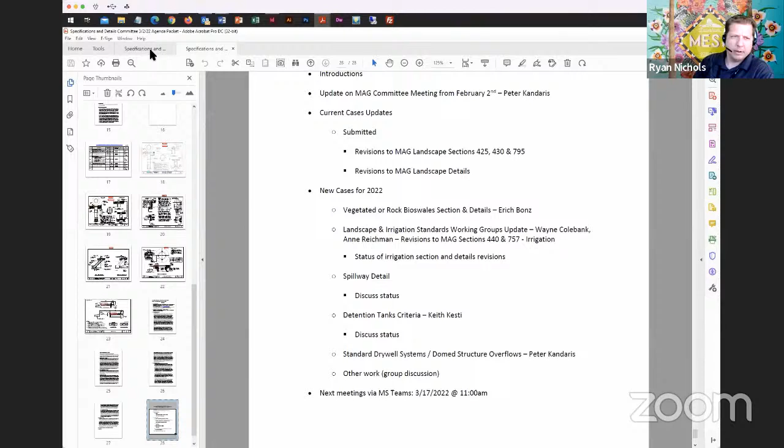Any questions or comments from the committee on any of the working groups? Peter, I had a question - were you working on underground retention specs and details? Yes, that's what Keith Kesti is primarily working on right now. He's using, I think City Chandler is the primary one that he's using their detail to start with.

Okay, thank you. Hey Peter, just on that, I know I've mentioned it before, that underground CMP tank - we have some fairly serious concerns about continued use of that, because of all the failures that we've had. Maybe it's a mandatory coating that is the solution, but so many failures that we're honestly considering pulling that.

Yeah, and because of that, Keith recognized that. He talked to Speedy Associates - and I just lost his name for some reason - Al, he's been talking to the consultants on that specific issue because there's certain recommendations that have to be done. If you're going to use a metal one, there's certain things that have to happen. It comes down to a lot of the treatment and the backfill, from what I understood. So he's looking at that to see what notes would have to be adjusted, and we could discuss that with you.

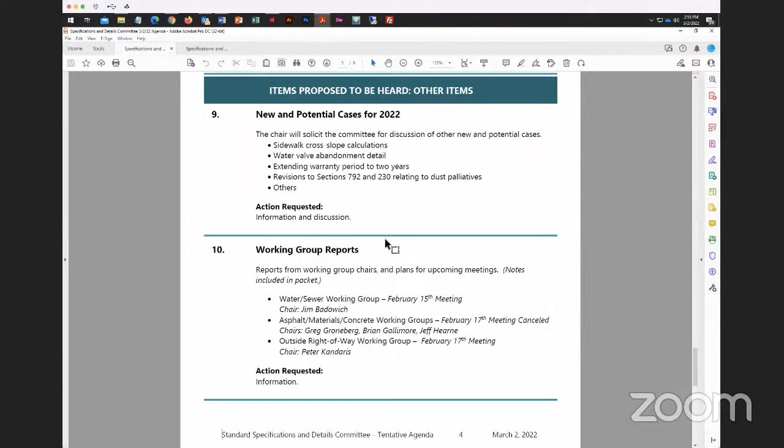Okay, thank you. Moving on to agenda item number 11, any requests for future agenda items be talked about now? Okay, hearing none. Agenda item number 12, comments, any other general comments or discussion?